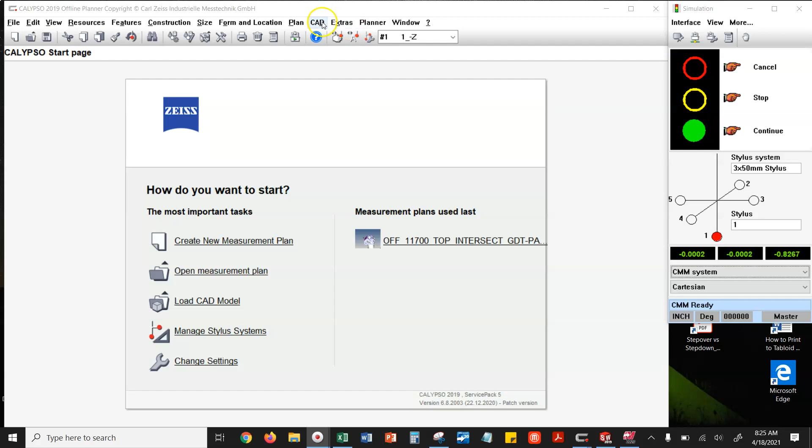All right, so we'll start by creating a new measurement plan. And we'll hit the CAD drop down and we'll say CAD file and load. And we'll load that same CAD file that we did in the beginning of this video series. We'll open up the air motor assembly.step, and that's available in the course information tab under the air motor folder.

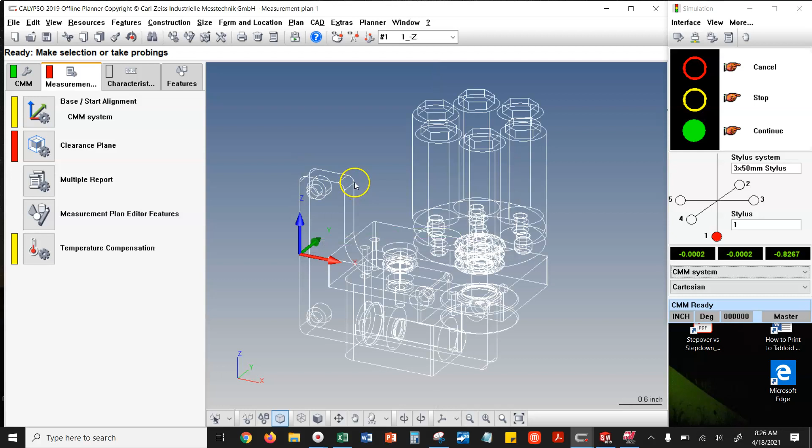All right, so this imports as an entire unit here, right? And what we learned in the previous video series is that we can either move each part individually or we can move the entire assembly all by itself. Either way is valid. What I actually prefer to do is pre-position a lot of these things in either Mastercam or SolidWorks, so that way if I have to make some changes, I don't have to redo all the steps of moving the whole thing as one or moving things individually. This can be particularly helpful when you're mating fixtures around parts and things like that.

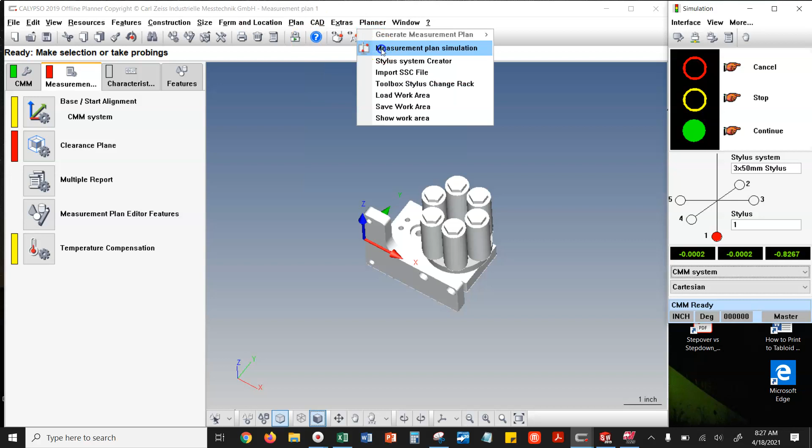But the first thing that we need to know is where is our coordinate system relative to our machine. So we'll go Planner and Measurement Plan Simulation. And let's turn on our CMM for this application. And let's set all this as normal. All right, so first thing we want to do is see how the part is oriented relative to the machine.

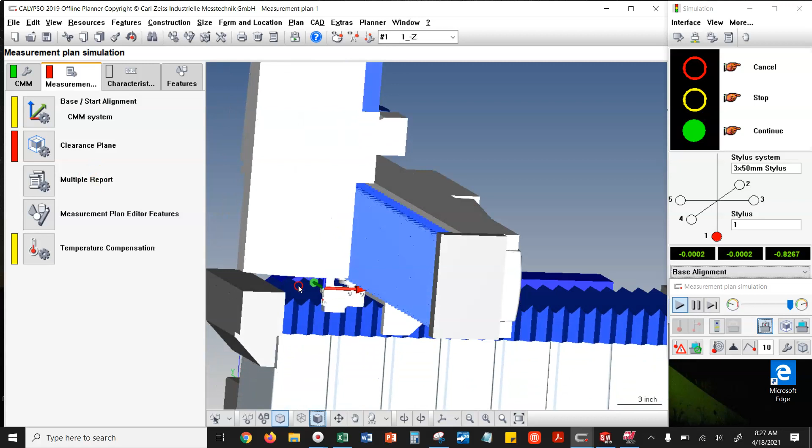Right, so it looks to me like, well, I guess for this step, we only really need to see the coordinate system. We actually don't even need to see the probe, so we'll turn that off for a second. We just want to grab a snapshot of this just so that we know what it looks like. So I'm going to open up PowerPoint, and I'm just going to start a blank presentation. And then I'll come over here to the snipping tool.

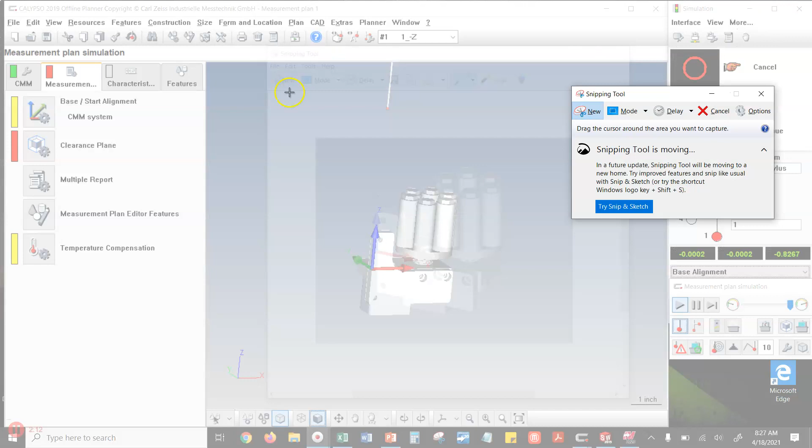You can see I already did this in preparation for this video. Let's just grab a snip of how the coordinate system is oriented, and this will help us to map this to what we're going to see in Mastercam. All right, and now we'll turn our machine position back on, and we'll show our stylus system here.

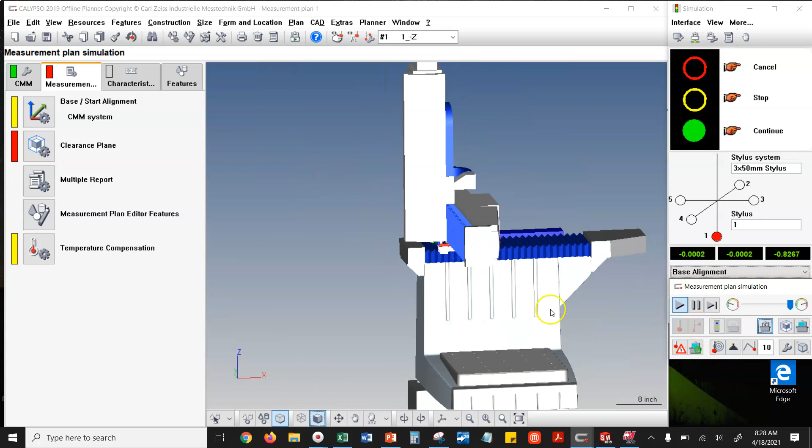And all I want to do is figure out where do we want to move this part to. Well, we really want to put this part sitting flat on the base. Right, so we want this surface here that's shown as the front, we want that to end up being the bottom. So we want to sit that flat on this base right at the center, let's say.

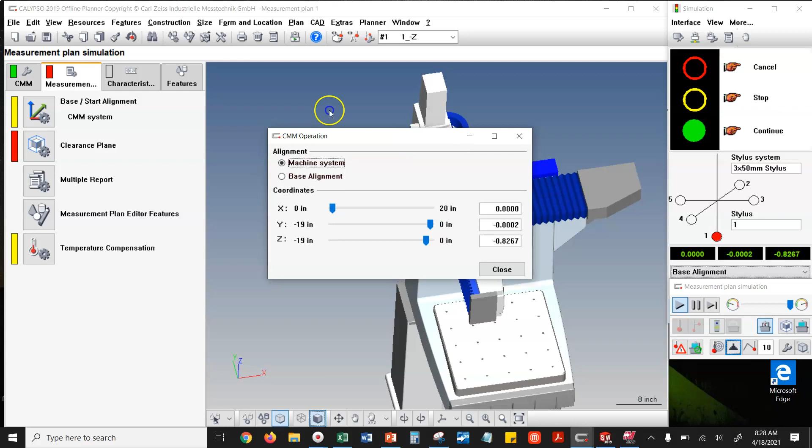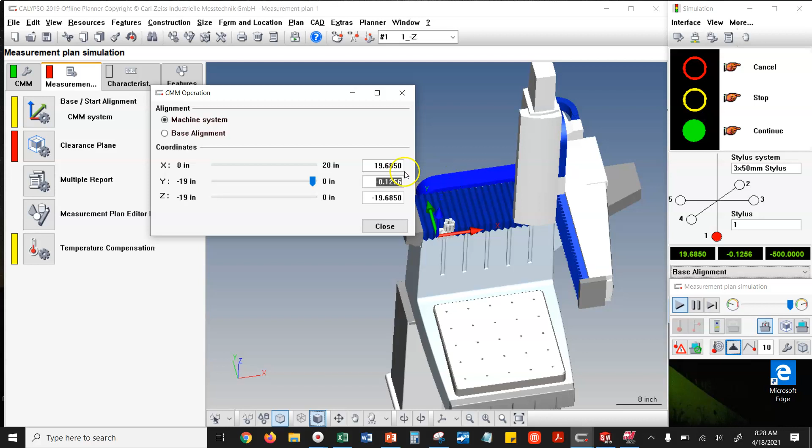Well, for this application, we can open up our joystick. We can move by machine system, and it looks like our total travel is about 20 inches. What it actually is, is 500 millimeters converted to inches. So let's say that our X is going to be about 10 inches. It's going to be somewhere in the middle here, 10 inches. That's very strange how it does that. We're going to be somewhere close to 10 inches.

In our Y, we're going to be somewhere close to minus 10 inches. And then in our Z, we're basically going to be as far down as you can get, which is 500 millimeters divided by 25.4 gives you minus 19.685 inches. So our coordinate system is really going to be X positive 10, Y minus 10, Z minus 19.685.

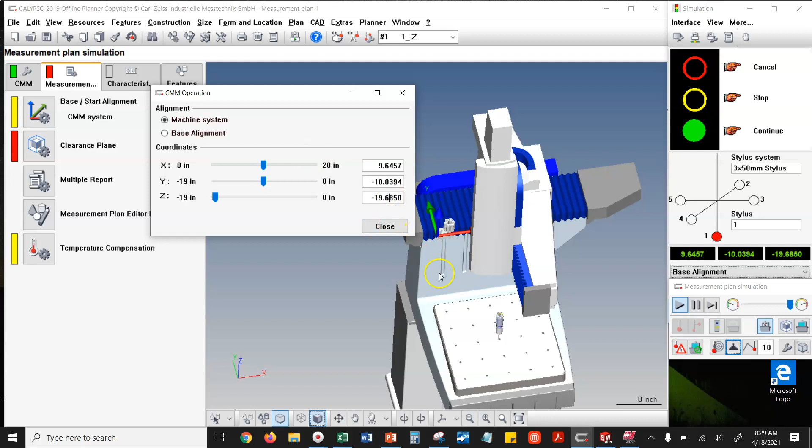Now this isn't going to put us exactly in the center. If you want to put them exactly in the center, you have to do the math to basically divide 250 millimeters by 25.4. That'll give you the actual numbers. I prefer just 10 and 10. All right, so now that we know that, let's go back into Mastercam here.

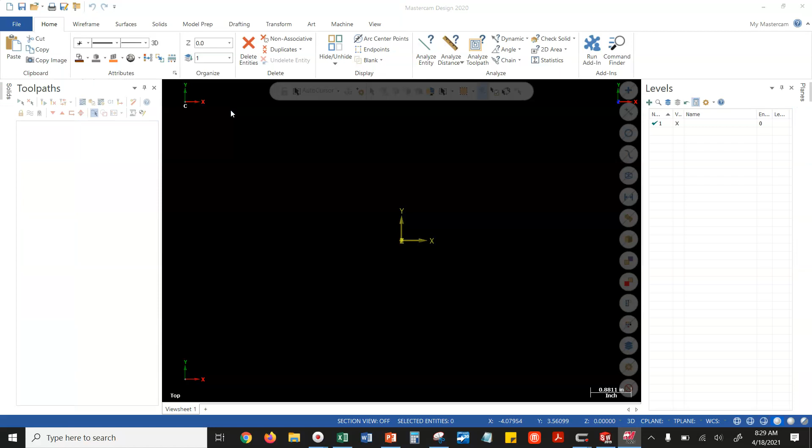And we'll go File and Open. And let's go grab that same file that we just downloaded. And we're not seeing it here because I have this set to Mastercam files. Let's set the filter down here to all files, and we'll open up our air motor assembly. And this will open up as one big old file with a whole bunch of individual parts in it.

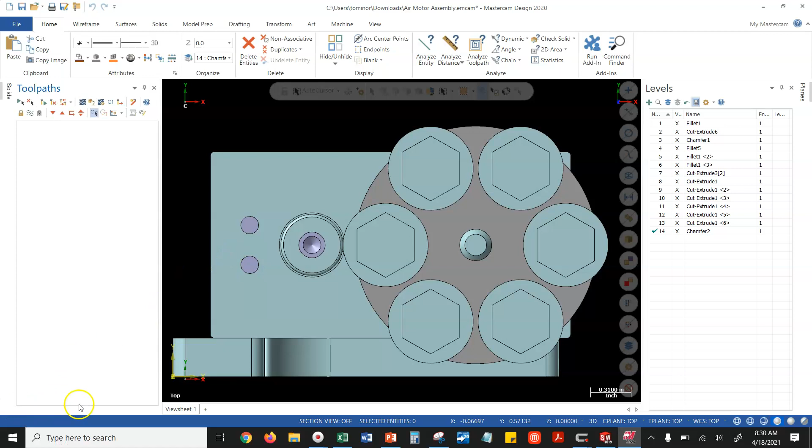Here you can see my levels manager; this might be down here if you're using the default Mastercam layout, right? But I've moved mine over to here. On the level manager, I can turn things on and off, and that can be really helpful. Just keep in mind when you save these files out, it's only going to save what is visible on the screen. So you might want to just turn everything on.

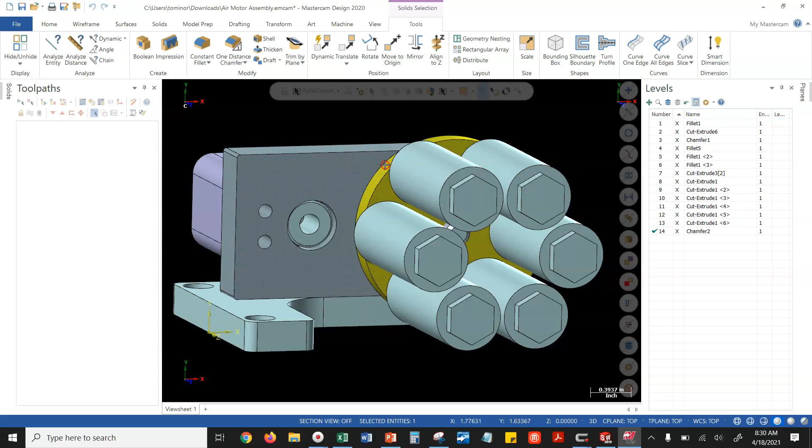Just turn everything on here. Okay, but that can also be helpful if you have some components that you want to help you see where things need to be, and then you don't want them to actually be in the CAD file, just hit the little X on the visible column here and they will go away.

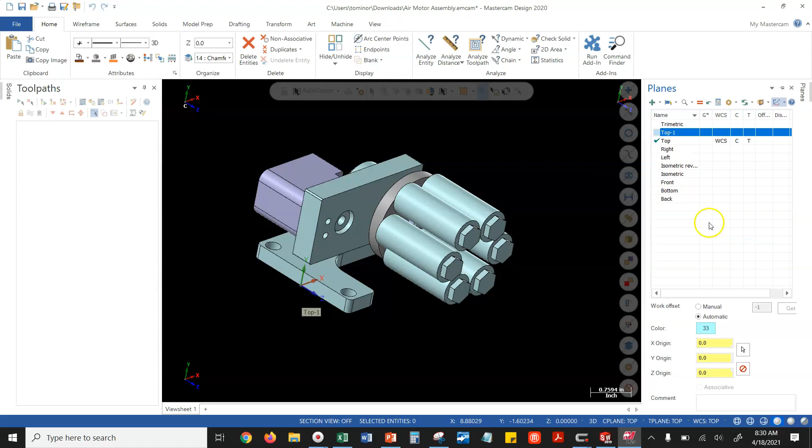All right, so let's start by looking at our Planes Manager. And again, for you, that might be down here somewhere. For me, I've just relocated mine up here. I find it works a little bit easier for me. I'm going to right click on the top plane and I'm going to come down to duplicate. And now I have top-1. And then I'll right click on it and say edit.

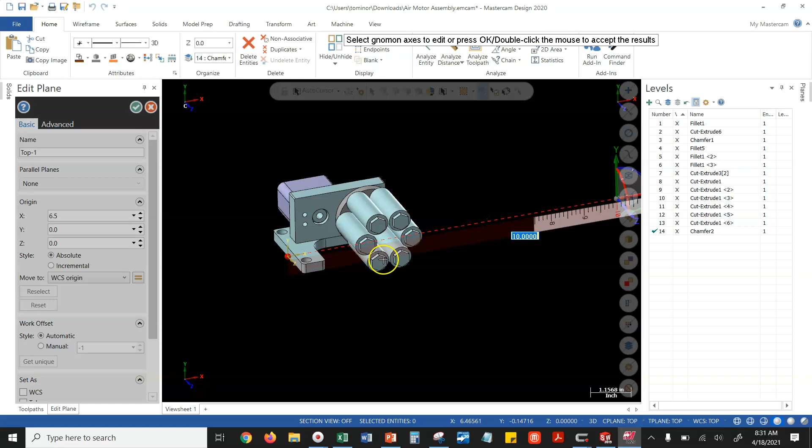And this coordinate system is aligned with Calypso's coordinate system right now. So let's grab this and let's move this positive 10 inches. So I grab the x-axis line, this red line right here. And then I'm just going to type in the number 10 and hit enter. And then the next thing we have to move is our y-axis. And remember, we want to move our y-axis minus 10. So I hit enter once more just to save that number I typed in.

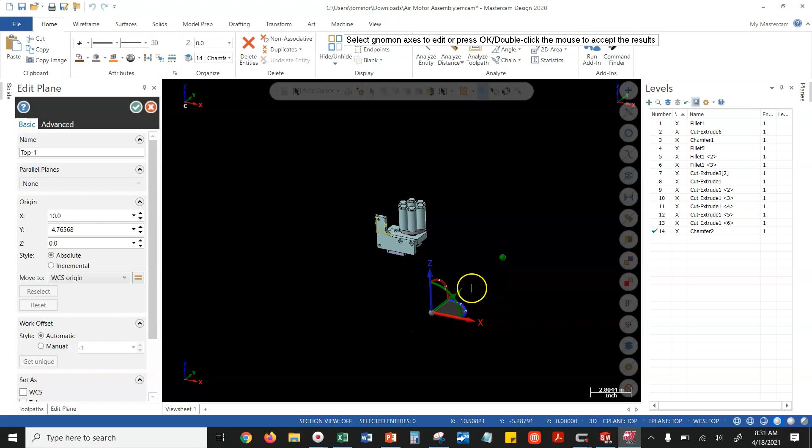Now, notice that I'm specifically highlighting this green line and I start pulling it back and I type in minus 10. I hit enter and that gives me the preview. I hit enter one more time and it saves it. And then this is kind of cool. This is another reason I like Mastercam and SolidWorks.

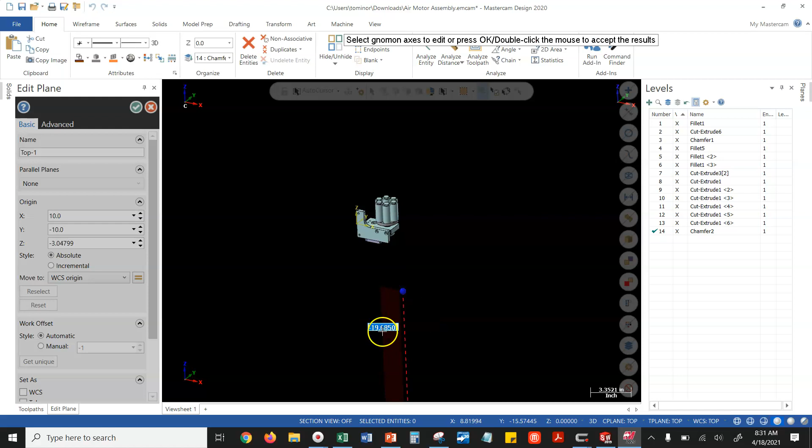I want to move down 500 millimeters, right? So I'm going to type in minus and then I'll do a parentheses 500 divided by 25.4, and this will give me the mathematical exact number of how far that is. It's minus 19.685. So you can type in mathematical functions directly into that window. Just hit enter to save it. And this little blue dot here is the preview of where you moved from, just in case you're curious.

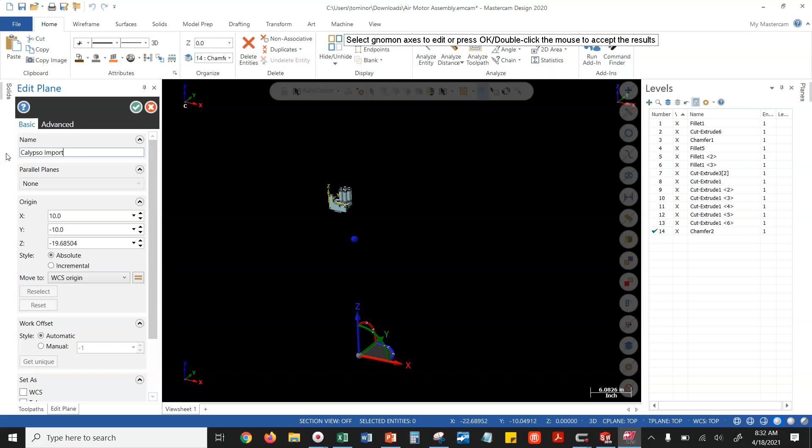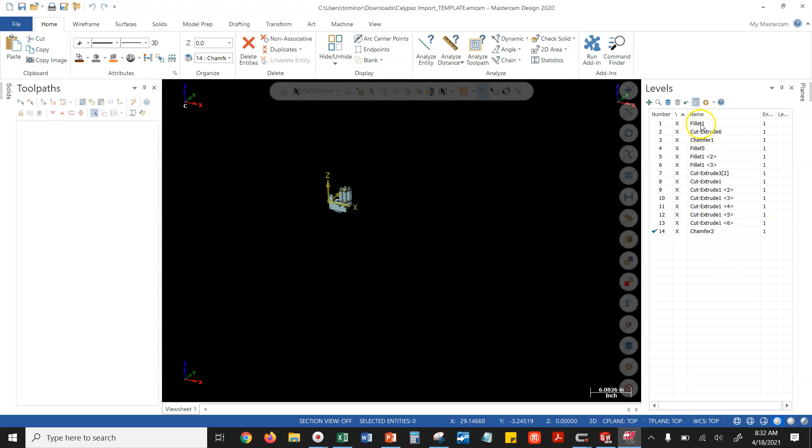All right, and then we can rename this plane. We can rename it Calypso Import. And if it's helpful to you, you can actually just save this Mastercam file out as a template. You could do a file, save as, and you could come in here and call this Calypso Import Template and say save. And then you could just delete all of these files out of your levels manager here, and there's your generic template. And whenever you want to import something, all you have to do is move this part from this coordinate system over to the other coordinate system.

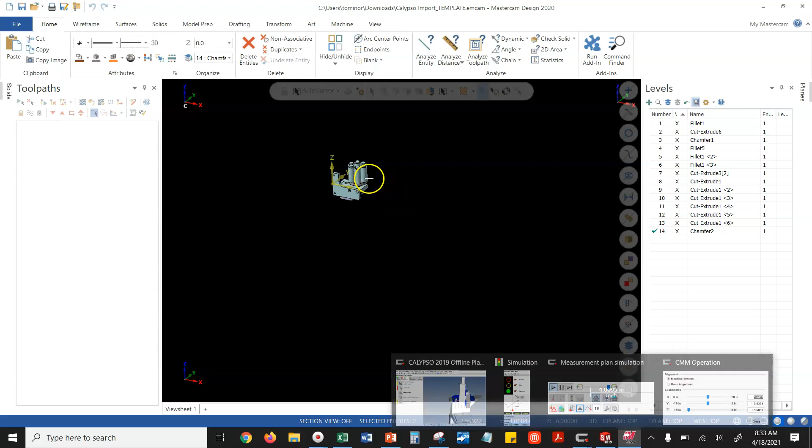Because if we import it right now, it really doesn't make any difference the fact that we opened it in Mastercam. We could save it right back out of Mastercam, we could import it right back into Calypso, and it would end up right back in the same spot. So the magic here is in knowing what we need for a coordinate system, right? So we want to move this model from top to Calypso import. All right, well, to do that, we need to make Calypso import active. So we'll click on that and we'll hit equals.

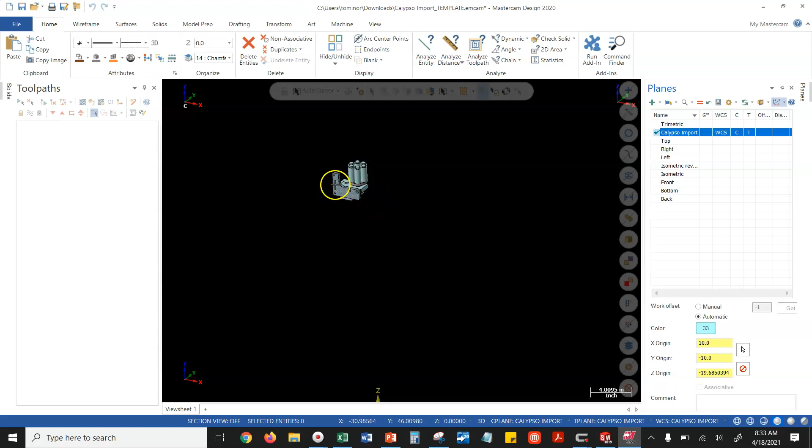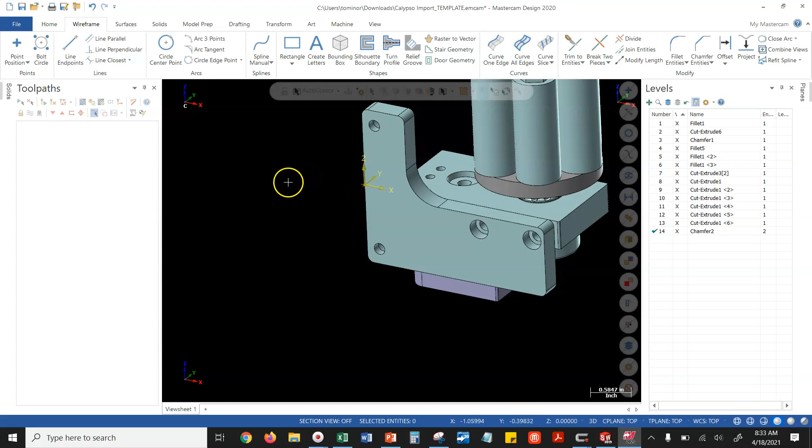And now we can't see where that other coordinate system was. So when we try to move this, we're not going to have a quote unquote pinpoint. So just because I just did this in preparation for this video, I realized I need to add a point position that is at the origin. Now in this case, that happened to be at the center of this line. But sometimes your import position, just based on the way the model was created, won't actually be at the origin, right? So you need to know where that origin really is to make this work. You need to give yourself a pinpoint.

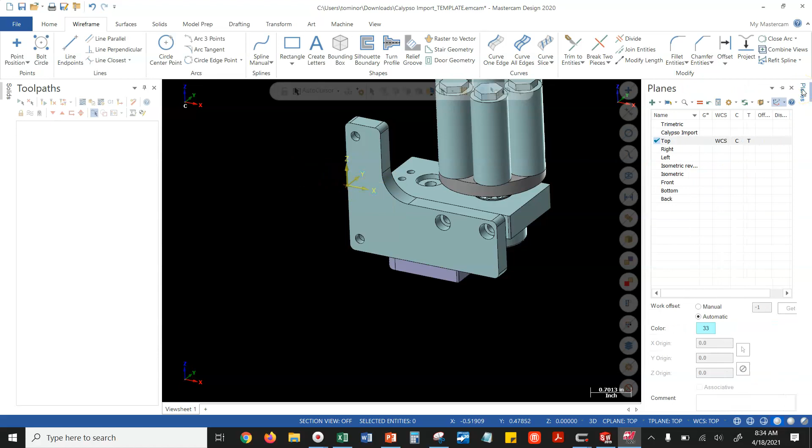And in fact, that point right there, that would want to be in this template as well. If you're going to save a Mastercam template for yourself, you would want to have the point there for where you're going to go from. Because when we move this, we want to make our Calypso import coordinate system active, right? And there you can see our X, Y, and Z. And now we can grab all of this.

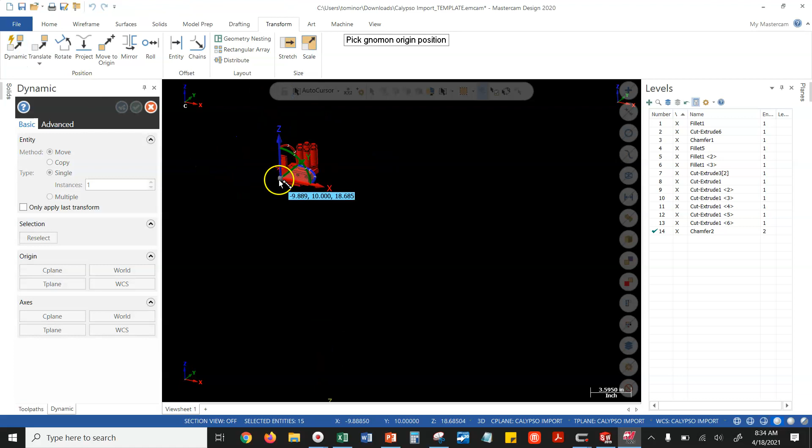So I'm just clicking and highlighting on the screen, and I'll come over here to transform and I'll say dynamic. And the fact that I already highlighted all of that meant that the transform dynamic command already knows what I want to move. So now the first thing I want to do is pin my gnomon, or triad, or trihedron, whatever you want to call it. They all mean the same thing.

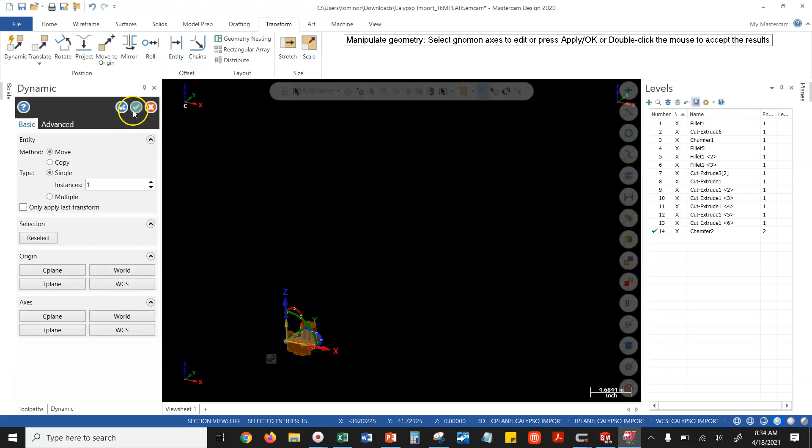I want to pin that to my part, and now it's pinned, and now I want to click on this gray point in the middle, and I just want to drag this over to here, and then say OK. Now, we've only completed part of this step right now, right?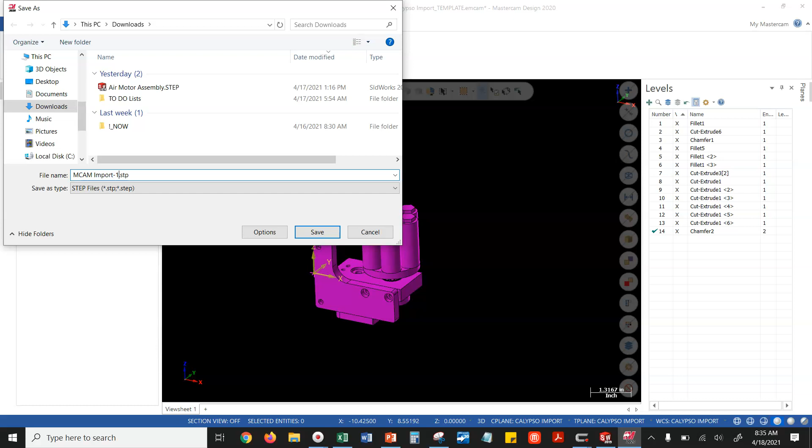So now I'm just going to hit File, Save As, and I'll hit Browse. And just remember here, this wants to save as a .emcam file by default. That is not importable into Calypso. So we have to just hit the pull down here and change this to a step file. All right, so I'm going to name this mcam import -1. And you'll see why I'm naming it -1 in just a second.

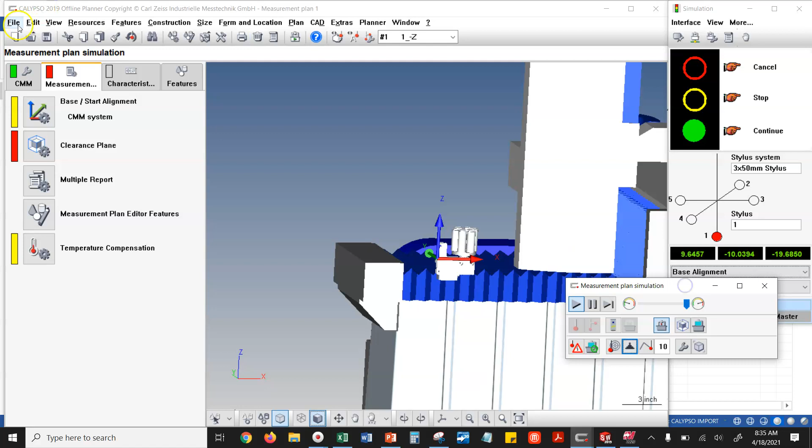Well, if we come back over here into our Calypso, you can see the model that we already imported here. You can see that's obviously not coming in the correct orientation that we want. It's also not coming in the correct location. All right, well, let's get rid of this model. Probably the fastest way to get rid of this model is to just go File and Close All. We haven't done anything yet, so no big deal. We'll just close everything and we'll create a new measurement plan.

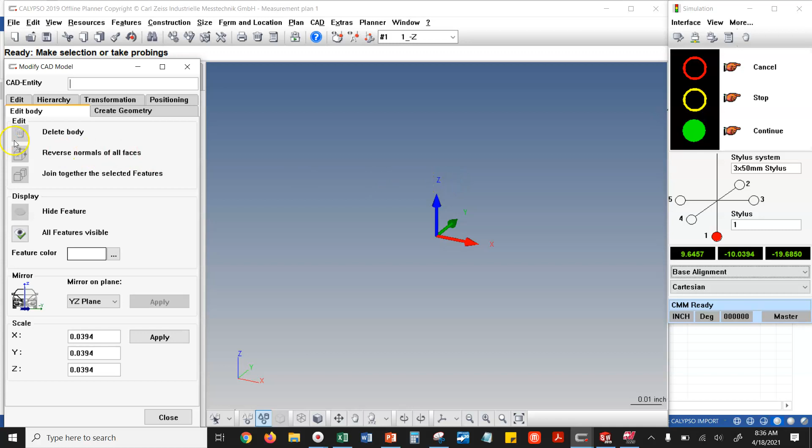Also, if we had some things in that file that were valuable, we could have come into the CAD and Modify CAD Model window. We could have come into hierarchy and we could have deleted all the CAD models that way as well. Or we could have done edit body and we could have clicked on every single model on the screen and we could have said delete body, and that would have gotten us to exactly the same spot. So depending on your application, one may be faster than another.

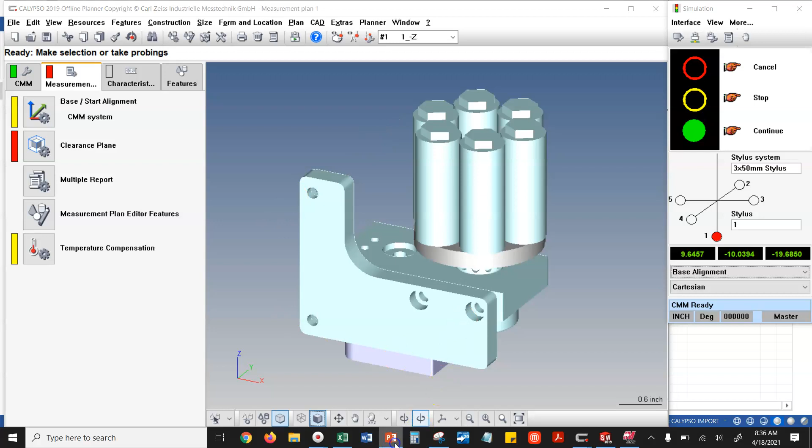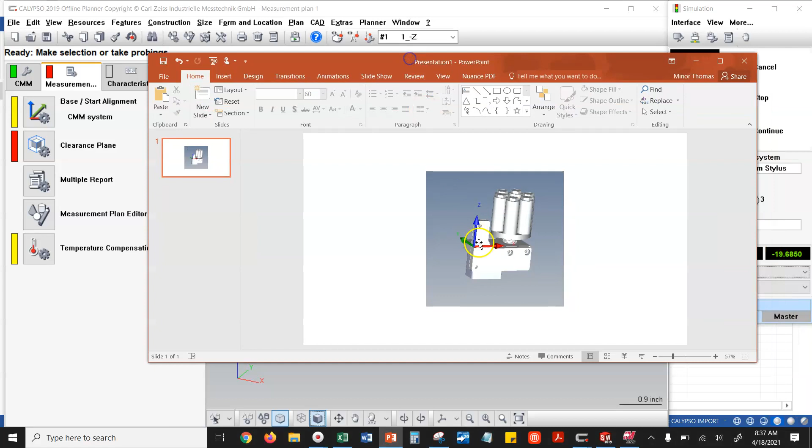All right, so we'll go CAD file load, and now we're going to grab MCAM import -1, and I'll say open, and let's take a look at where this ends up. All right, so it looks like this imported exactly the same way, right? That's funny, I never did paste this. Let's paste that into PowerPoint real quick. So that's how it was before, and notice that this looks almost identical. There is one difference though. Notice the trihedron icon was on the part before and now it's not.

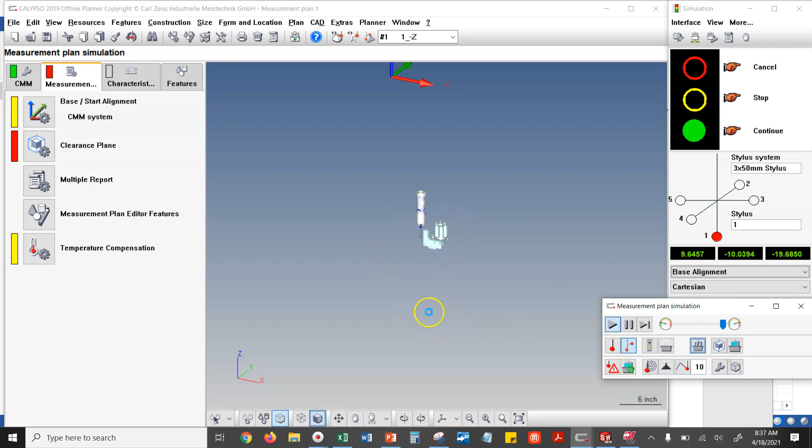So if we scale out, aha, I see. So that delta X, delta Y, delta Z that we built into our Mastercam file, that actually did move this to the correct location, but we never did correct the orientation. And this is why I saved that as -1, because we're about to do this again, but we're going to have one additional rotation. We'll save the model as -2, and you'll see that we really only completed basically half of what we wanted here. We corrected the location, but we did not correct the orientation.

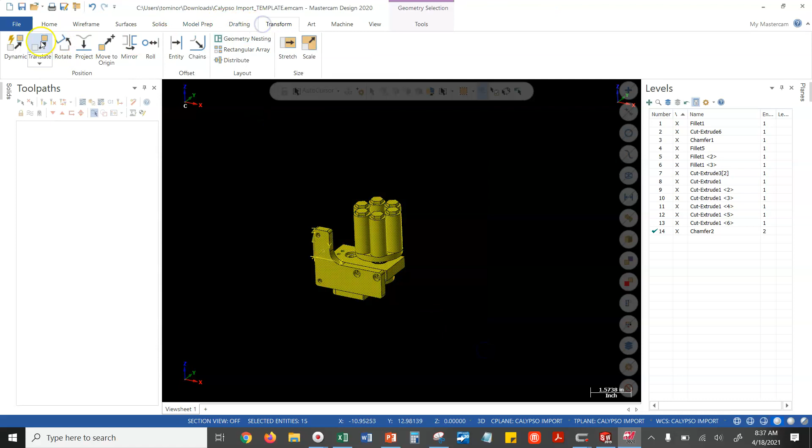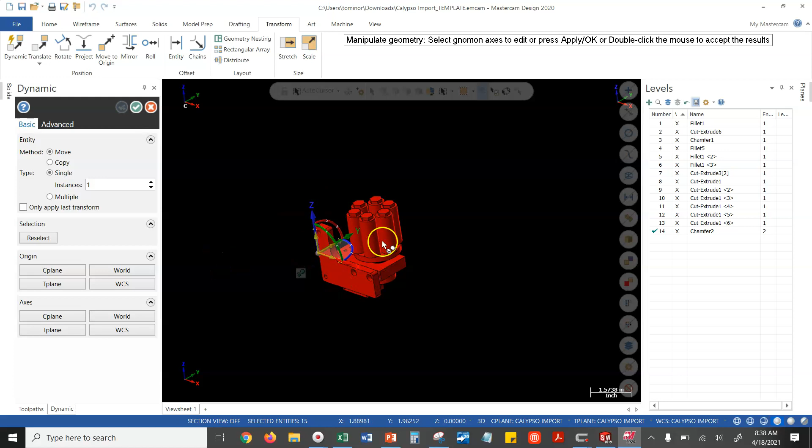All right, well, we'll come into Mastercam and, whoops, forgot a step here. We'll grab this and we'll say transform dynamic. We're going to make sure that we pin this at the origin so that way we don't move the location of our model, in other words. This is what I was talking about in the last video series with having a pivot distance. If you plant this gnomon off of your origin, the part will pivot around that. So that just gives you kind of weird performance. In fact, let me do that and show you what I'm talking about.

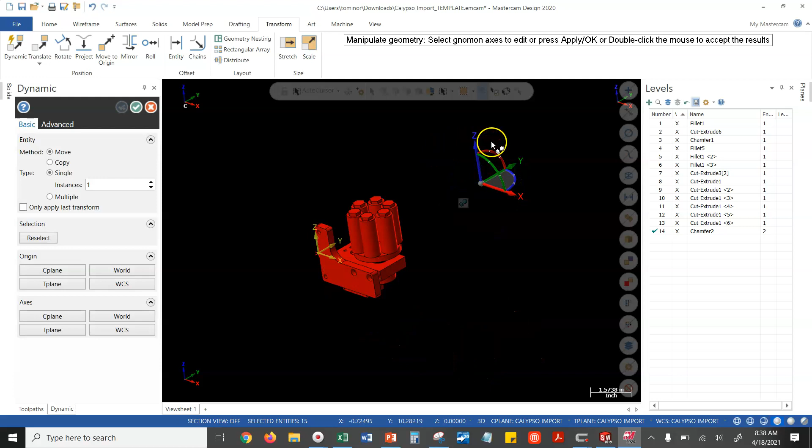If I plant this thing way over here, now when I rotate these models, you see how they're pivoting in space? That's really not what I want, right? No matter which way I go, it's going to have that weird pivot distance. That one happened to be pinned pretty close to where the model was. This one's pretty far away. So we really want to pin this so that it's at our origin. And now when we rotate, we can correct our rotation very easily without affecting where our part ends up.

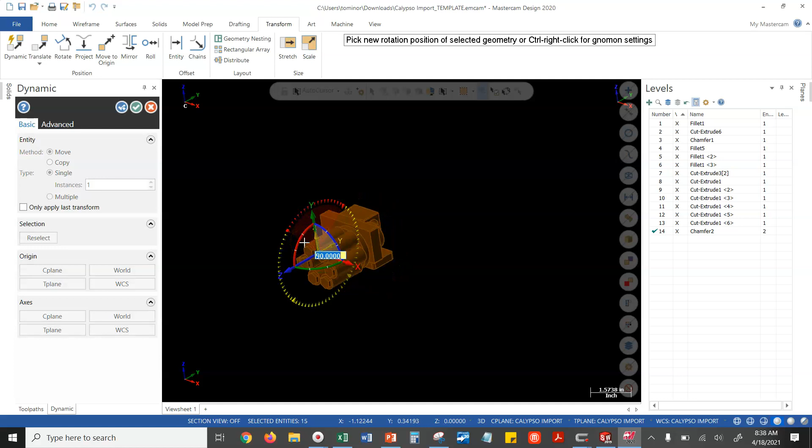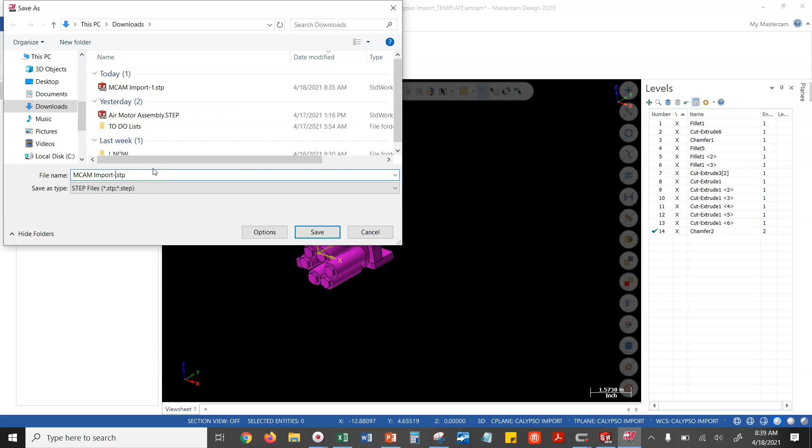So if we just rotate that 90 degrees and we say OK, and then we go File and Save As, and I'm just going to save this as a different name, just so I have the other one as well if I want it. Remember to hit the file filter here and save this as a step file, and I'm going to name it the same thing, but it's going to be -2 now instead of -1. And then we'll come right over to Calypso again. And this time let's do this the other way. Let's turn our machine off and we'll go modify CAD model and we'll hit edit body and we can hold down Control and grab all of these bodies.

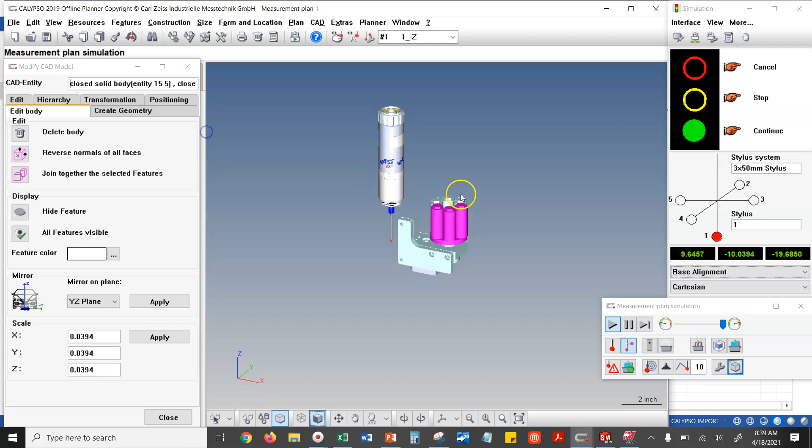Control A does not work here, so it'll actually get rid of whatever you have highlighted. So if we click on those and click delete body, you see this does work as well. I wouldn't do this if I just wanted a blank slate normally. I'm just showing you that it can be done. This is mostly helpful if you have one part that's in the correct spot, but you have a bunch of other parts that are not.

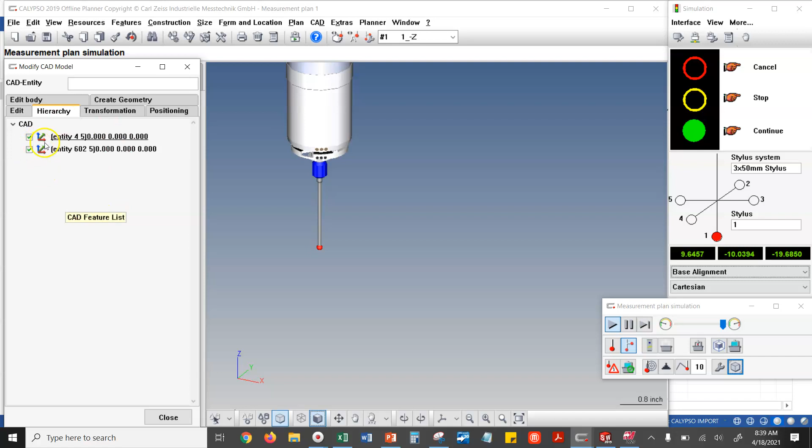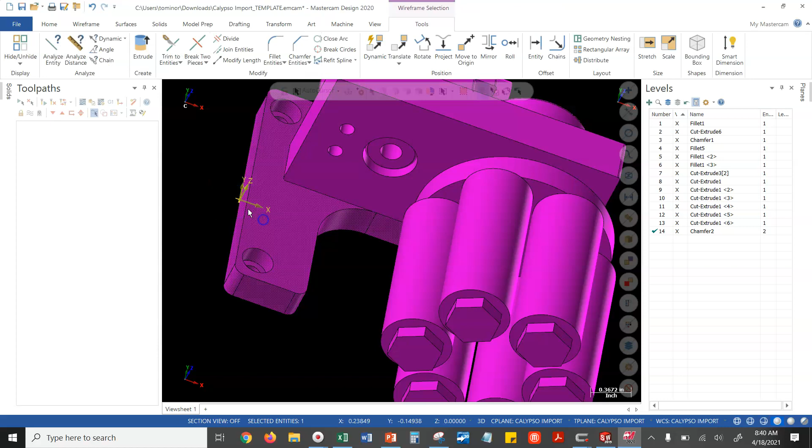So now when we come into hierarchy, you see all we have is entity 4 and entity 602, whatever that is. I think this entity right here is actually the point that we created in Mastercam, believe it or not. That would be this point that I forgot to turn off. This point right here, that's at the origin, is likely what that other entity is. You can see that little point.

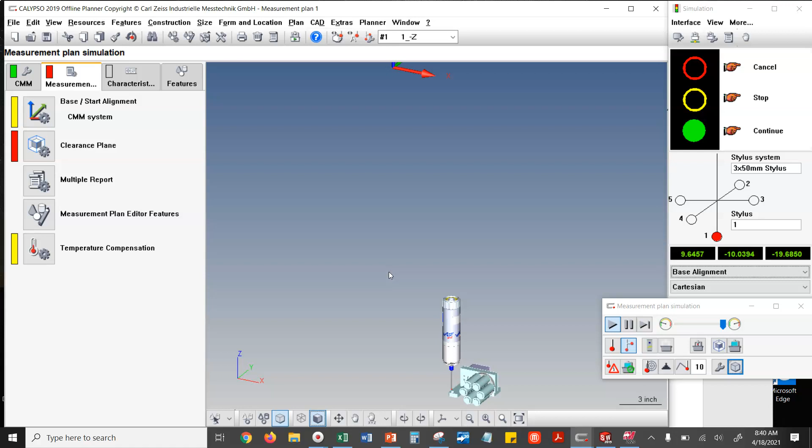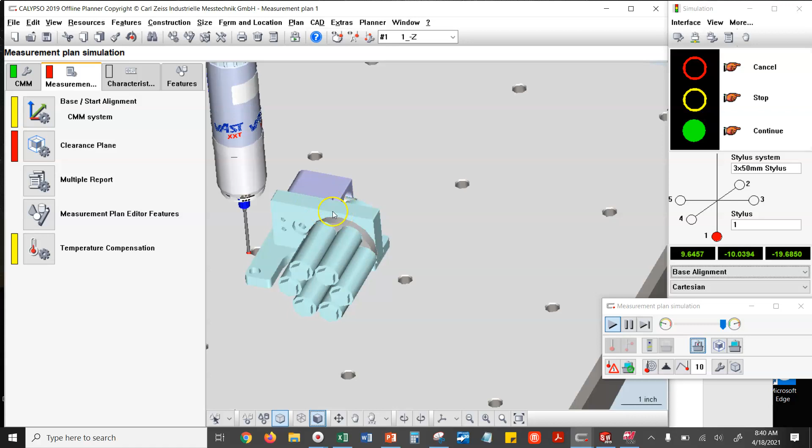So anyway, that's that. Let's go CAD file load, and then we'll grab MCAM import 2. And in theory, this will drop right in there in the correct orientation and everything. All right, so it looks like that is good. If we want to make this look exactly the same as we did in the other video, I'll show you how we can rotate the entire model and how we can place this cylinder directly on top of this surface exactly like we did.

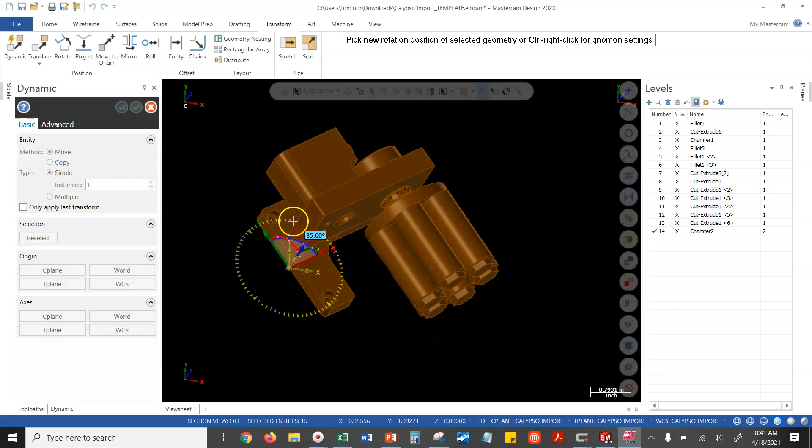All right, so if we want to rotate our model and we want to rotate it about this point, that's going to be another Control A. We'll come up here to Transform, Dynamic. We'll plant this right at the origin, and we'll grab, in this case, our blue arc here. We're just going to rotate that 90 degrees and say Enter.

And it's my opinion that these tools in Mastercam are just a lot friendlier, certainly than Calypso. And I would make the argument that once you get comfortable with them, they're probably easier to use than SolidWorks as well. You don't have the dependency of the mates that you have in SolidWorks.

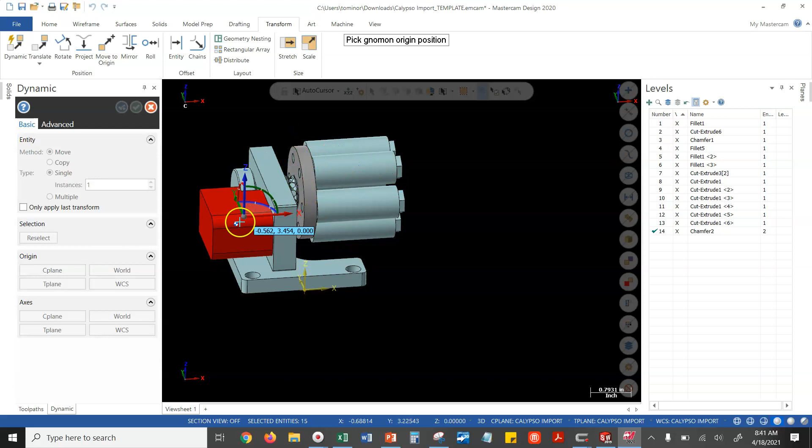Okay, so I also created another Transform Dynamic, and I've selected only the cylinder. I'm planting the rotation point directly at that little blue and white icon in the middle. That is the centroid or volumetric center of this part. Right, I rotated the part minus 90 degrees. Now I'm going to modify the dynamic gnomon instead of the model. This icon means move the model. You click it, and now I'm moving my dynamic gnomon.

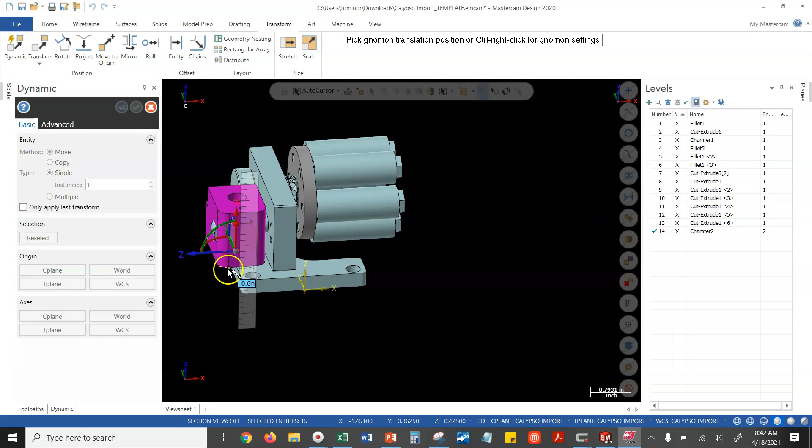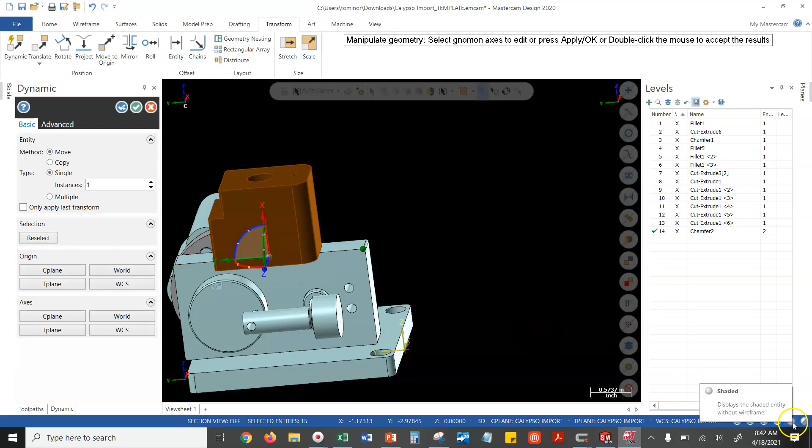And I'm going to pull the X by itself and plant it at the bottom. And then I'm going to switch back over to moving the model. I'm going to grab this and plant this up on the part somewhere. Okay, and it looks like I have now controlled for where the Z is. Now I'm going to pull the Y over so that it's centered, and maybe switching over to a translucency toggle might be helpful here. And then we'll pull the Z and we'll pin that halfway as well.

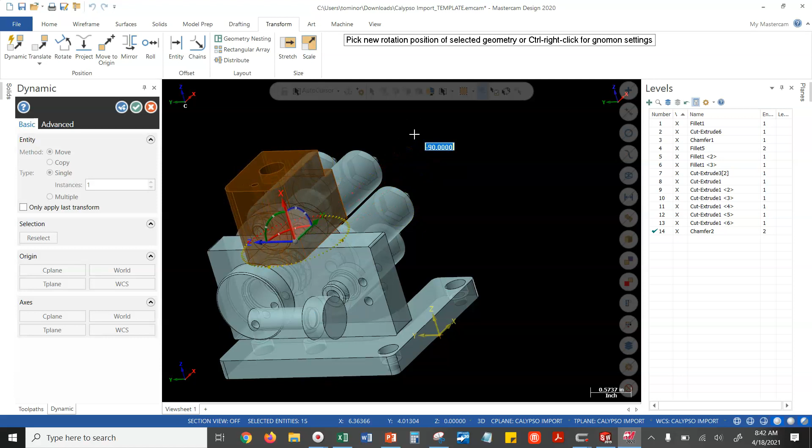And then what do we want to do? We want to rotate this whole shebang 90 degrees. So in this case, it's actually minus 90. Like I said, you can see how easy that is to move around in Mastercam. Really a lot less dependencies, but you get the preview, you have the control of being able to rotate or move. You can do multiple parts at a time with this as well.

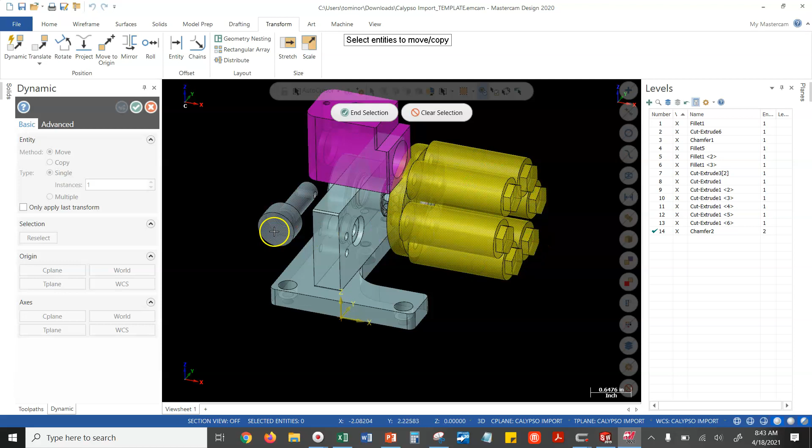We can go dynamic, and we can grab this part and this part and this part and this part and this part. So we're basically moving an entire subassembly, and we could move that subassembly off like this. Okay. In fact, this will look exactly like we did in the last video, but that's a nice little nugget there. Let's move this whole thing off exactly 2 inches. We're just going to move that subassembly off 2 inches.

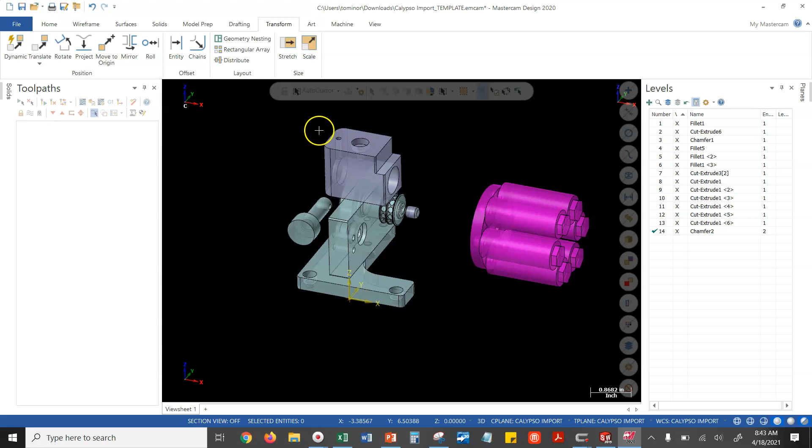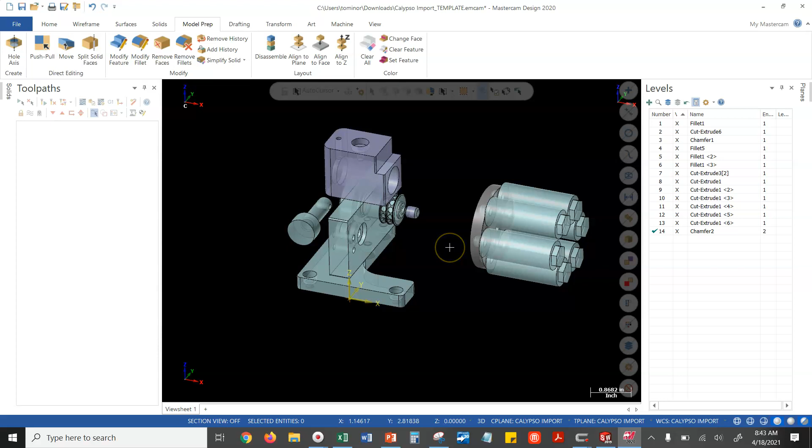And now, you know what? I don't like the colors of all those. I'll right click and I'll clear the colors. I'm going to grab every single model here. I'm going to do a Control A, come over here to Model Prep, and say Clear All, and I'll hit Enter. Then I'm going to do a Control A again, right click, and change the color of these to gray.

The one difference here is I want to come up here to the cylinder, right click, and change this to a light blue color. And then I'll do a File, Save As, and this is going to be exactly the same result that we got in the last couple of videos when we were moving this in Calypso.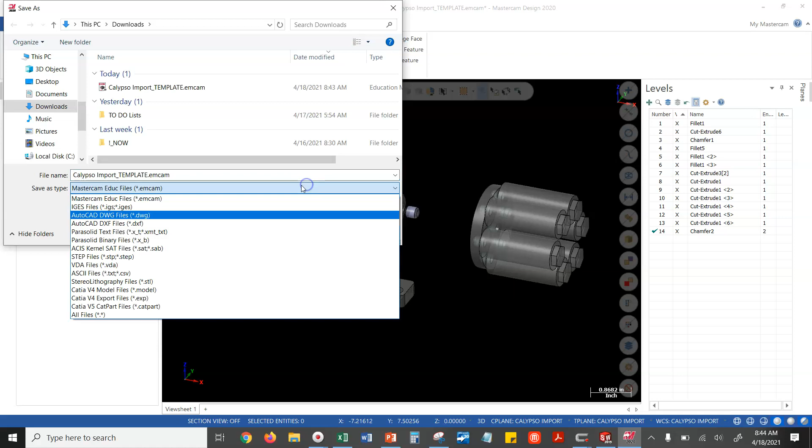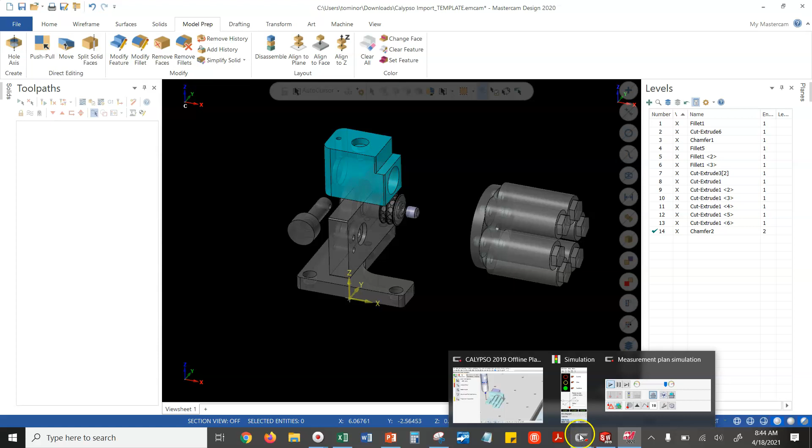However, now we'll end up with this entire subassembly moved off, which, as you know, in Calypso, that might be a bit of a headache to try to do that. And you can see in Mastercam that's much easier. The other thing I like is that this Mastercam file is now separate. So if I import something into Calypso and make a mistake, I don't have to redo all of those steps to get back to where I was. I simply open the same Mastercam file.

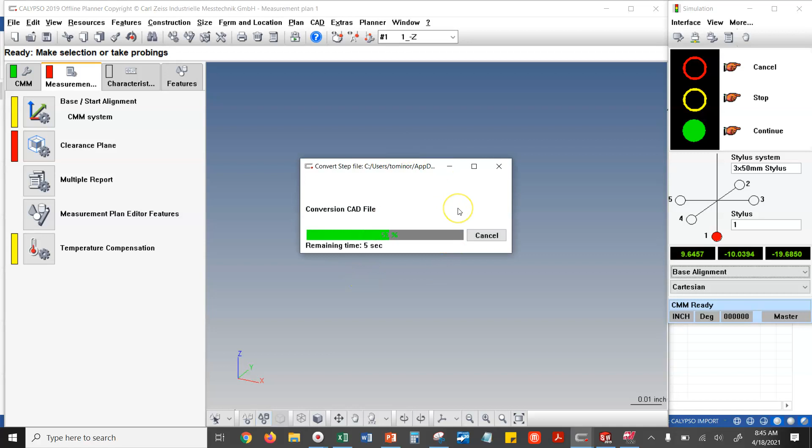All right, so we'll do a File, Close All, Yes, and then we'll do a Create New Measurement Plan. We'll go CAD, CAD File, and Load, and then we'll grab MCAM Import 3. Notice I'm taking my own advice here. I'm saving often, and I'm saving under a new name. So that way, if I do make a mistake, I can always get back to where I left off.

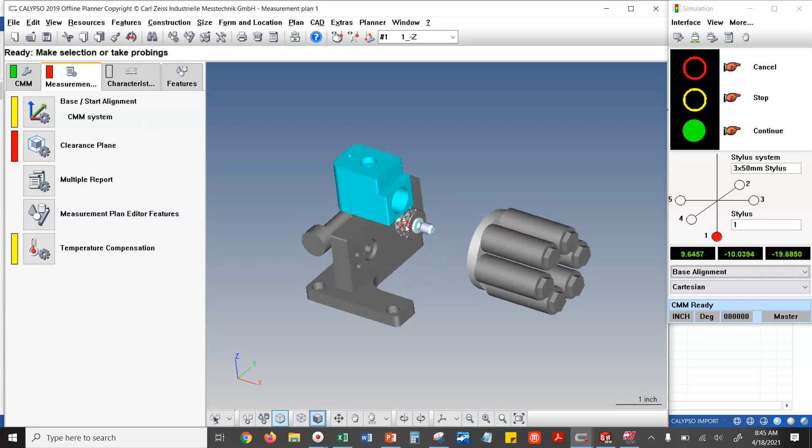So I guess this looks good. It looks like the orientation is correct. It looks like the colors came in here where everything is gray, except for that one part whose color didn't change for some reason. Notice this part did come in as blue or teal or whatever color that is. And our gnomon is way up here. So let's make sure this is sitting in the correct spot on the machine. All right, it looks like it is sitting in the correct spot on the machine.

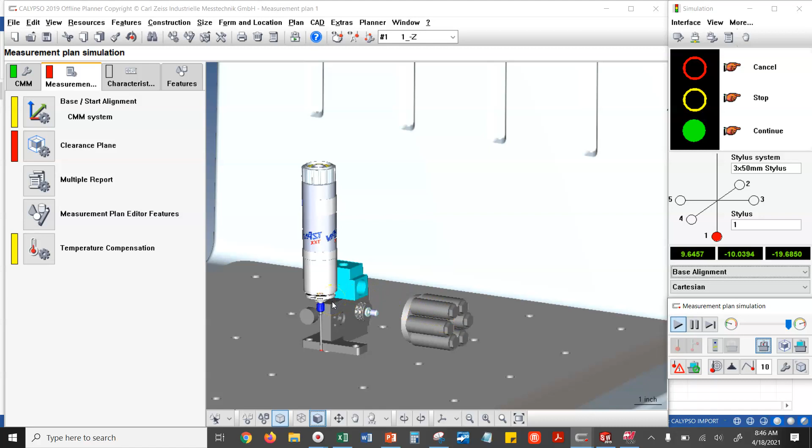All right, so the last thing I want to do here is set a quick base alignment just to make sure that this actually works. So again, this whole time we're simulating, we're using this assembly just because it was quick and easy for me to grab. It was already on Blackboard. But really, this could be used to represent a fixture. So all the fixture files would be gray here, and then a part, which is represented in blue. So ultimately, we're using the fixture just to represent areas where we cannot move for collision detection. But then ultimately, we still need to align to our part.

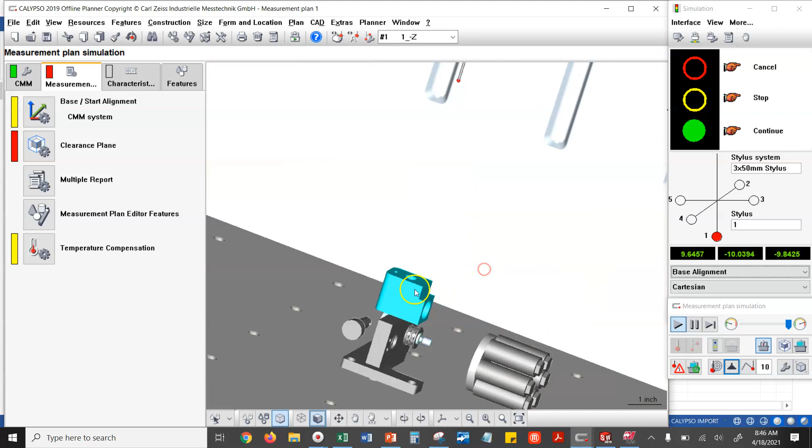Well, our base alignment came in way up here. So that's not going to work for us. Let's make sure that we can get that base alignment to come down to the intersection. Let me move the probe out of the way here. We want this to come down to the intersection between the top surface, the front surface, and the left side. And you see how this is rotating with a pivot distance here? I really don't like that. I'm going to right click and say define rotation point. I'm just going to stick that on the part. I click directly on the part, and now the rotation works how I think it should.

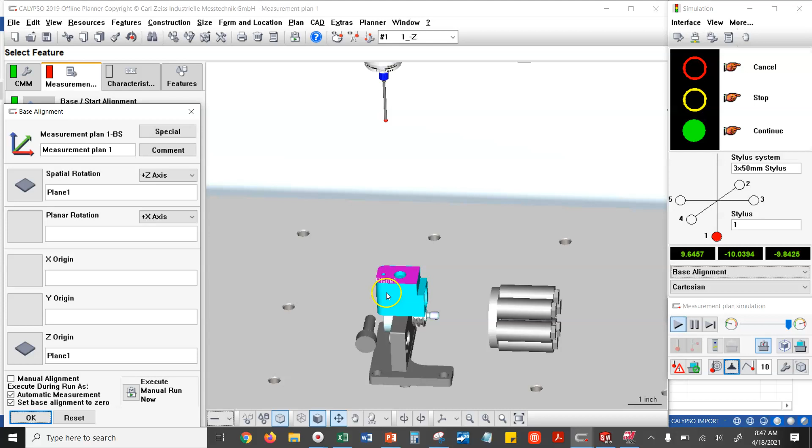So we'll open up base alignment. We'll say OK. We'll hit the pull up. We'll say define select geometry. We'll grab the top plane. We'll define a line on the front plane. And then we'll put a point on the left side and say OK. And I like the preview. I like what I see out of that trihedron. And when I say OK, we should see that the preview will be applied.

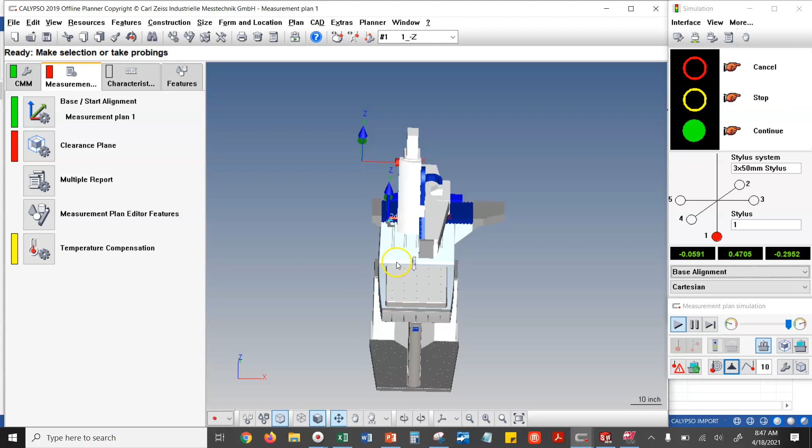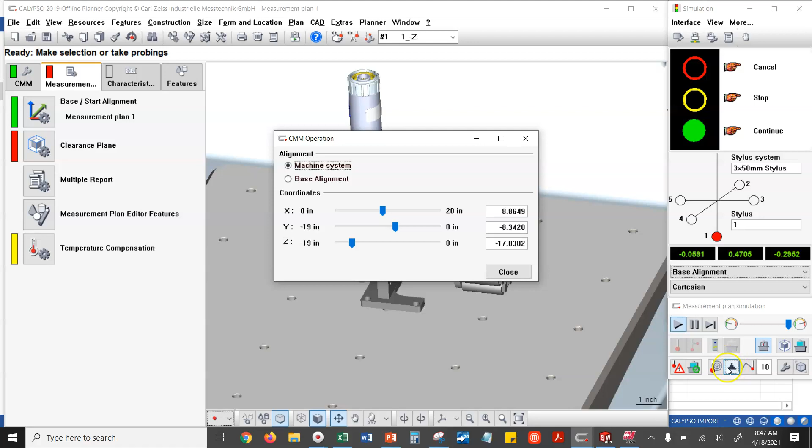And notice that the machine, whoa, that moved our part way up to the machine. What's going on here? That moved up to machine origin. Well, let's turn off the machine and turn it back on. Aha, there we go. So that's exactly what we wanted. So Calypso simulation is just a bit hokey. Sometimes it has to refresh itself. Ultimately, to check our location, we open up our joystick dialog, go to base alignment, type in X0, Y0, and a Z of 1 inch, and then we close out. Does that look like it's in the correct location? Yes, it does. All right.

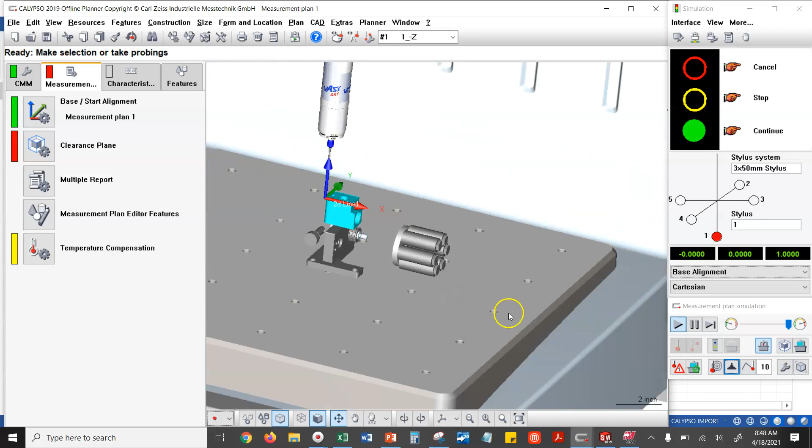So I'd like you to do everything that you saw me do up until this point. Get your CAD screen so that it looks something close to this. And then grab that snipping tool, go new, and grab a very similar picture to what I have here. The only difference is, to get credit for this assignment, I ask you to hit the pull down, make it red pen, and then just write your initials on here. And again, this is just to make sure that everybody is actually completing the assignment and submitting their own work. So you'll save this as a JPEG, go File, Save As, and then you'll attach that to the submission field to get credit for this assignment.